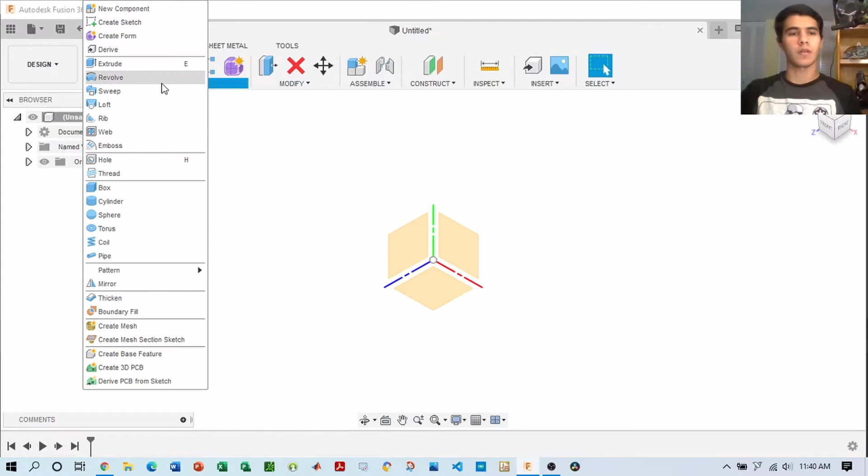So what we'll be doing today is I'll be guiding you through some steps you can incorporate in making these shapes or features. So what I did right now is create a sphere. Autodesk Fusion 360 already has a sphere feature incorporated, so you don't need to sketch a profile and then revolve it, although that could be another way. But like I said, you don't need to reinvent the sphere.

So there it is, it's a 70mm ball, and an overview of the different layouts. Over here on your left, you'll notice that once I created this body for the ball, it showed up here under Bodies. For Origin, there's a tab as well. If I want to, let's say, hide it, I can hide the body and it's gone.

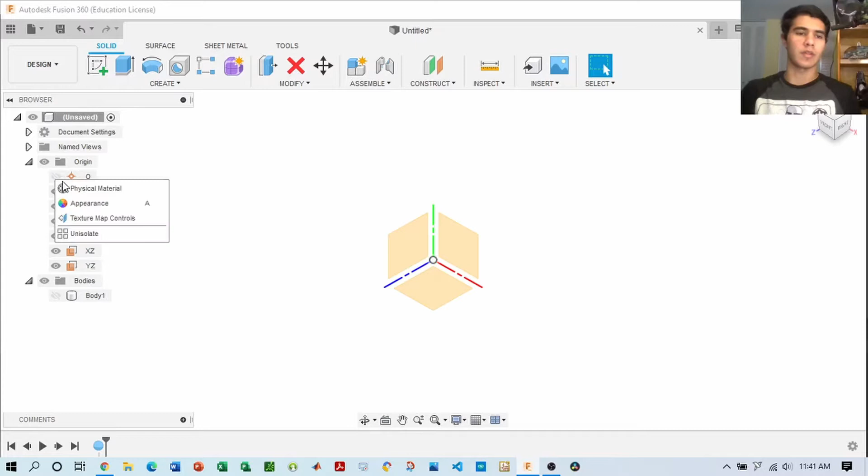If I want to hide any certain element within this plane, I can click on this eye looking icon and it's gone as well. Down here you'll notice every time you add a feature, it shows up on your timeline. So right now we just added a ball. If you want to delete it, you can drag this cursor down below and it disappears.

So we have our ball, and now we want to create the stars. In this case we'll be creating a 4-star Dragon Ball. Since you have the origin planes, but you don't have any other plane by which to draw it.

So what you could do, there's two different approaches to this. You can either draw in the middle, on the mid plane, or if you want to 3D print this, you might want to consider drawing outside, since you can't 3D print something inside, in the middle of a solid body.

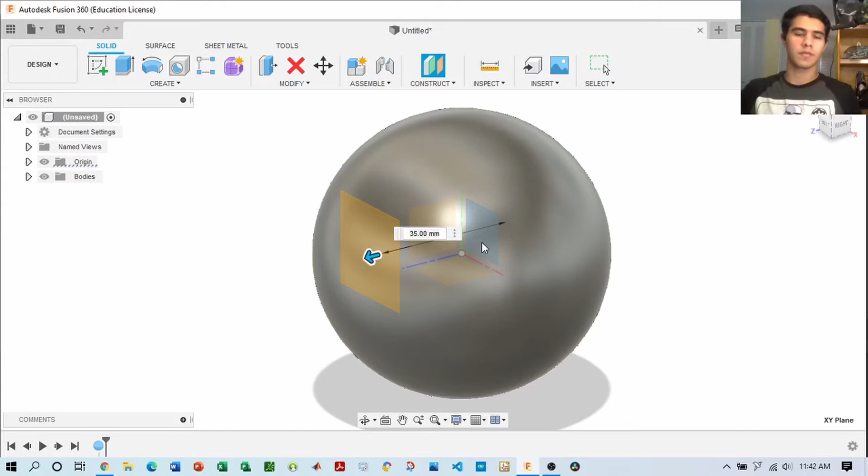So we'll be doing an offset plane. We'll be offsetting it, and you can see on the side our new plane created. And there it is, there's our new plane.

We'll be sketching on that plane now. So create sketch, it's going to ask you which plane you want to sketch it on. You can click on that plane and sketch it.

Now you can see to our left, we have a new tab called Construction. Construction is basically any planes, lines, points, or vertices that you make. Same deal, if you want to, you can go ahead and view it, or click it again to unview it. It sometimes helps to view it, but that's just your preference.

We'll click line. One feature about Fusion 360 is that it has a grid that it overlays over the object. This is helpful because you can have increments or incremental intervals by which you can snap your drawings to.

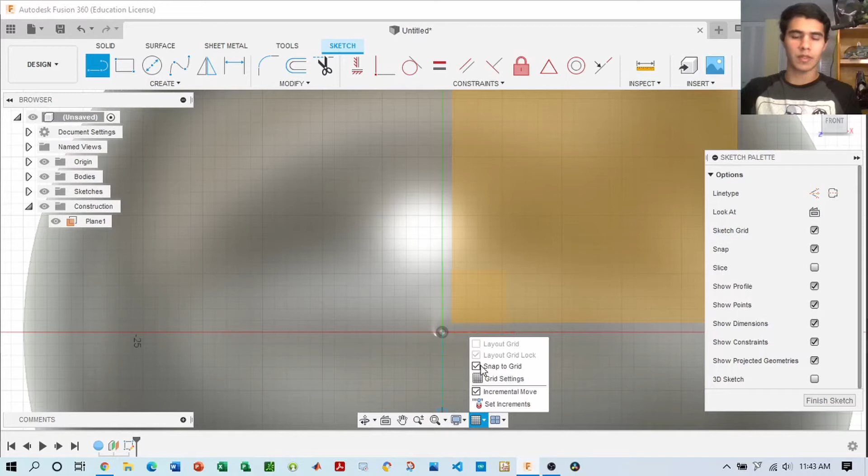The reason it snaps is because there's a feature down here called Snap to Grid. If you want to take that off, you can disable Snap to Grid, and then you can draw anything and it won't snap to the nearest block on this grid. For example, I'm just drawing something, it's not snapping to anything. Whereas if I enable Snap to Grid, every time you draw something it'll snap to the nearest object. See how it's snapping to the grid?

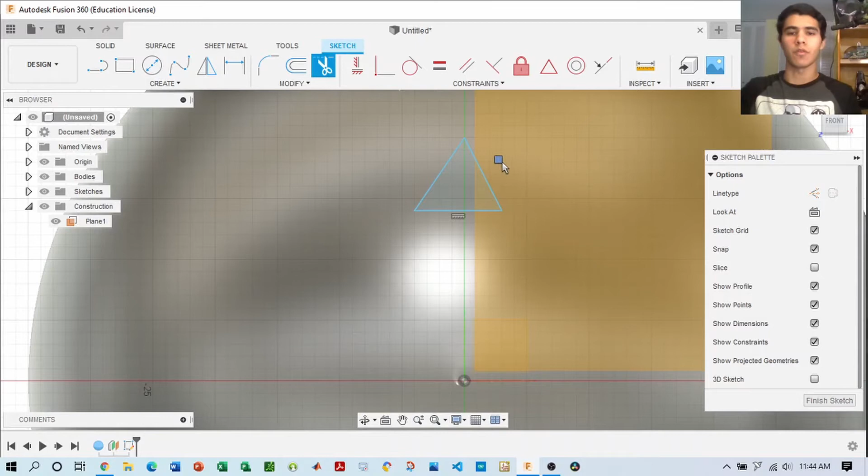So those are some useful features to incorporate when you're doing sketches. Since we're doing a 4-star ball, I'll be starting over here, and draw a triangle.

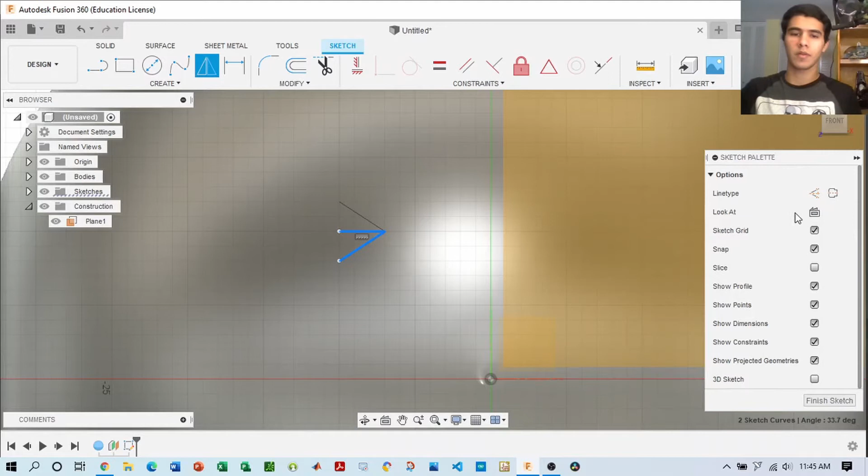You might be wondering, well, that's not a complete star. That's okay, let me show you some other features you can use to make this into a complete star. So right now I'm doing Mirror. I'm going to mirror one side of the triangle to the other side. It requires an object to mirror and the mirror line, and we have both. So we click OK, and now create a reflection of this object.

Next thing we want to do is a circular pattern of these two objects, along which center point? This center point. And it's going to create the star we wanted. In this case, it's a 5-point star. And that's it, easy as that.

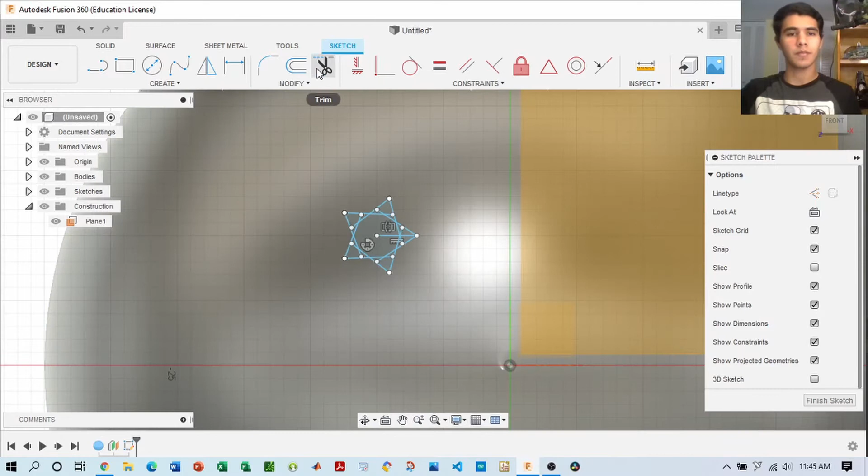We're done. All that's left to do now is edit these features. We can fillet it or trim it. Trimming is going to take away the lines and delete them, so it's a nice way to polish your sketches if you have excess parts. One more thing we'll be incorporating, a point here.

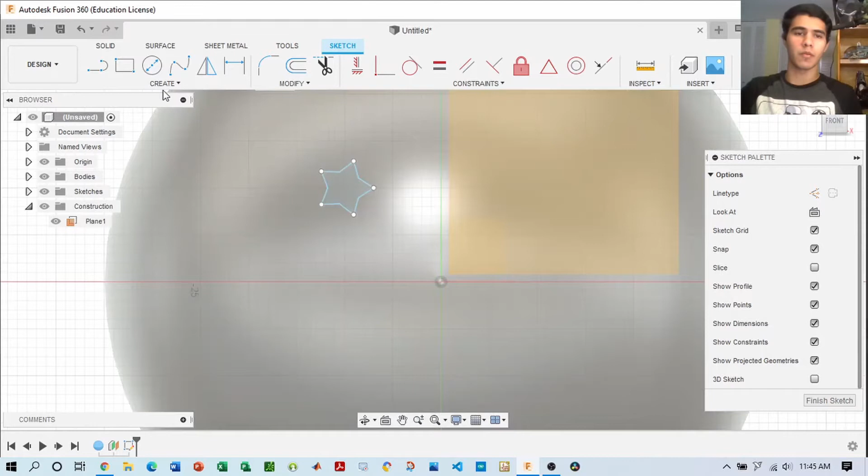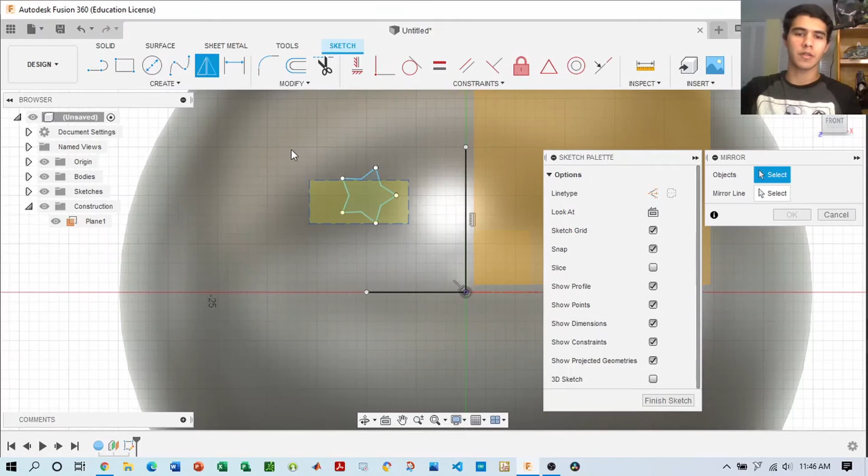Guess we can't, so we'll be incorporating 2 lines here. One line here, click escape, and another line here, click escape. It doesn't matter the size of these lines, since what we'll be doing is mirroring these objects over these lines. And then repeat the same mirror to the other side, and that will give us the 4-star ball we're looking for.

Looking pretty good, so now I finalize our sketch. And what is the tangible output is a sketch plane with 4 sketch profiles in the form of that lattice.

So we can extrude now. We click E on our keyboard for extrude, and we click our profile sketches. We want to extrude — in this case, we want to cut into the sphere. So we'll be dragging this cursor backwards into the ball, and it increments every 5 millimeters.

If you want to disable increment, you can go here to incremental move and disable that. All that does is basically, every time you click and drag something, it doesn't move by increments, it moves by however much you drag it, so it's not discretized. So we're going to go back and disable increments, and see now it's moving by every 1 millimeter versus the intervals you set it to.

It doesn't matter on which one you choose. Sometimes it comes down to preference, other times, depending on what you model, it makes sense to have by increments. For example, if you're doing prototyping, or if you have no idea how the concept is first made.

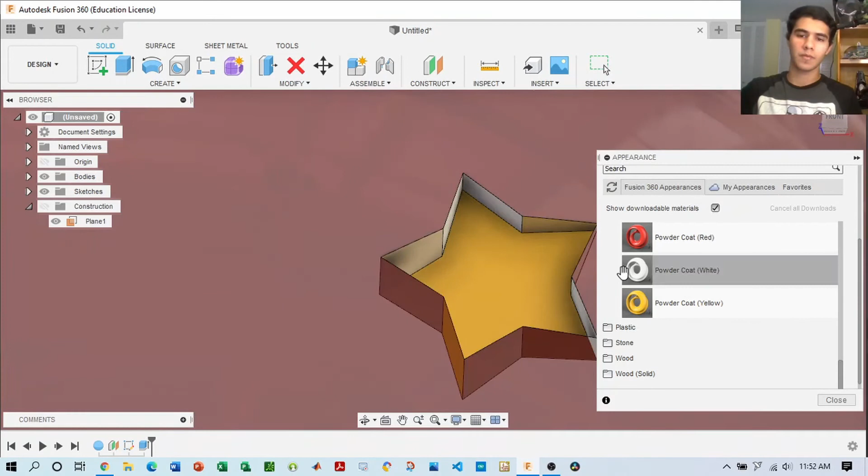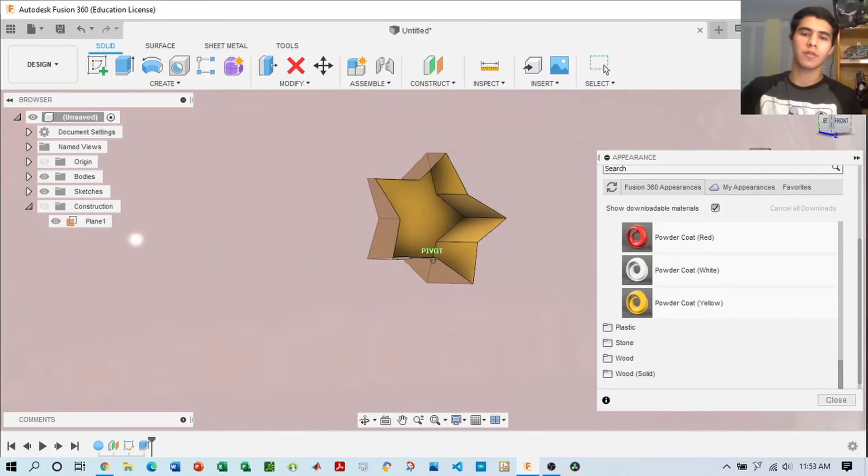If you're by any chance intimidated by Fusion 360, don't be. I think overall it's easier to manage than SolidWorks. The layout is much more presentable, easier to understand and navigate. The shortcuts are easy to learn, which I found personally appealing. Saves you so much time. But the good thing is to just get started today. Start modeling. Nothing beats practice on your own.

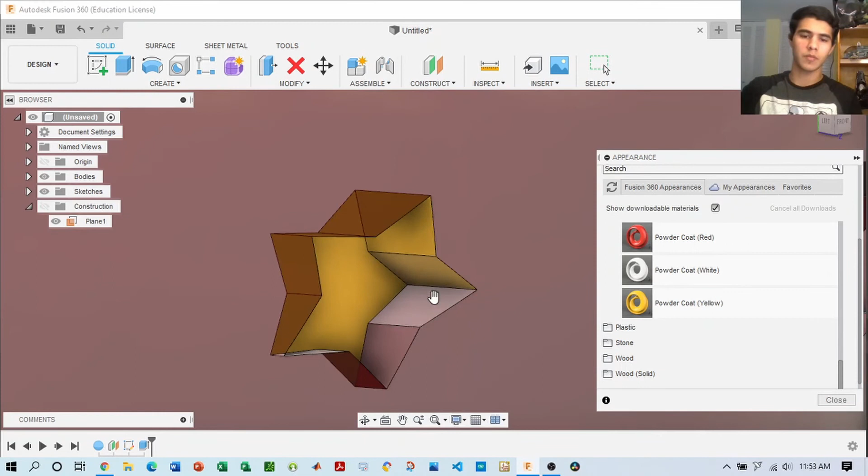How about that? So if you want to, you could leave it there. But let's say you want to change this color from glass to a different material. Let's go ahead and do that. And now let's make it more professional. Let's change the different colors we incorporated in this design so it can be as close as possible to the Dragonball.

How about that? So if you want to 3D print this, you can go ahead and just 3D print this. It will 3D print nicely. One other thing you could do to consider is when you inspect it, take a cross section of it.

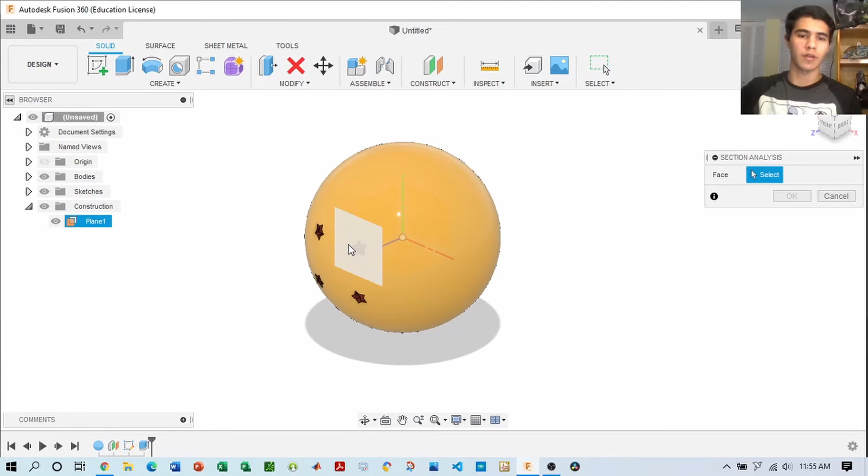So it asks you, okay, what face do you want to take a cross section of? And you can do a cross section of a plane. So you click and drag your cross section, and it will basically cut your shape in half. This will help you, for example, if you want to prevent extra supports from 3D printing. You just 3D print two halves together and put it into one. So that could help if you want to save up on supports.

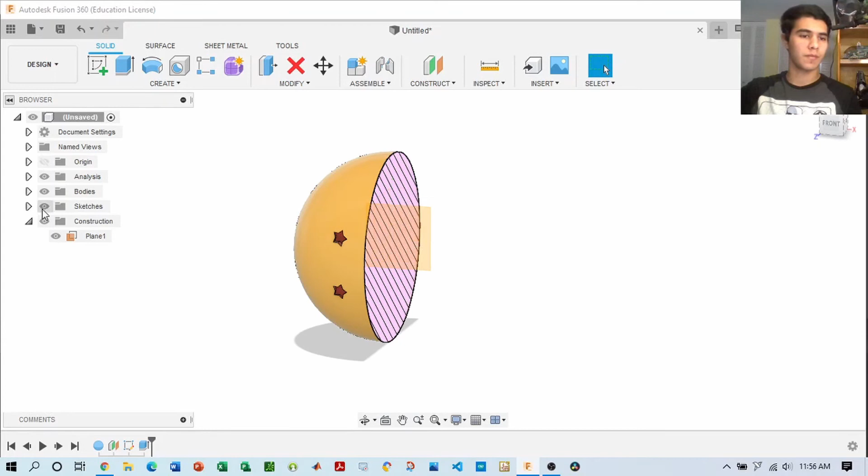If you want to, you'll notice here every time you construct a section analysis, you have this analysis tab now. So just like origins, you can click and hide it.

What's left? Well, now you know how to make one Dragonball. You can make the rest. But what I want to show you now is how to make this professionally presentable as a render.

So right now we have a render studio. And what that rendering studio basically allows us to do is make these objects more realistic. In a virtual studio, you can design to different settings, different exposure to light, etc.

So you just go to setup and you go to environment library. You can play with some features there as to how the lighting and the angle will reflect off the object. Usually I choose sharp highlights, but that depends on the object. This one looks good, and the different material properties you choose. Sometimes the light reflects better off metals, or depending on the object and material you select.

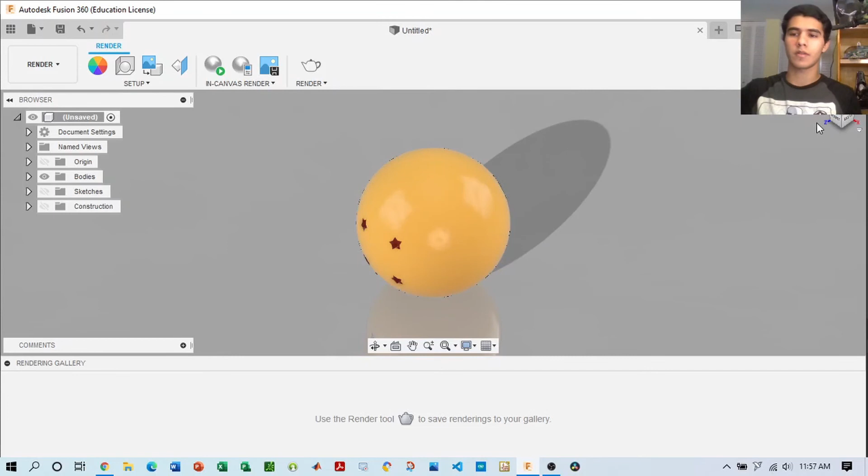So let's find an angle for this. That was like a nice angle. So once you're satisfied, you click render. So you need to save before you render. And you'll notice right now the title, it says untitled.

When you save it, it goes from untitled to the version you save it as. But in this case, every time you save it, there will be a prefix or a subscript that follows it. So right now it says public 4-star Dragonball version 0. That's because it's the first time you save it as this file. And the good thing about it is that it goes from version 0 to version 1. So after you save it for the first time, it becomes a new version.

And if you want to go back to an old version, you can do so down here. You go to your different designs and you see the different updates for your version if it's more than one. And you can see that design history, which is great to have.

So now you save it, you can render it. Let's render that. And the difference between final and standard is up to you. I don't think it's too much of a difference. That's why we're sticking with the 0 credits. But if you want to make it really presentable, then go ahead and just click the finalize render.

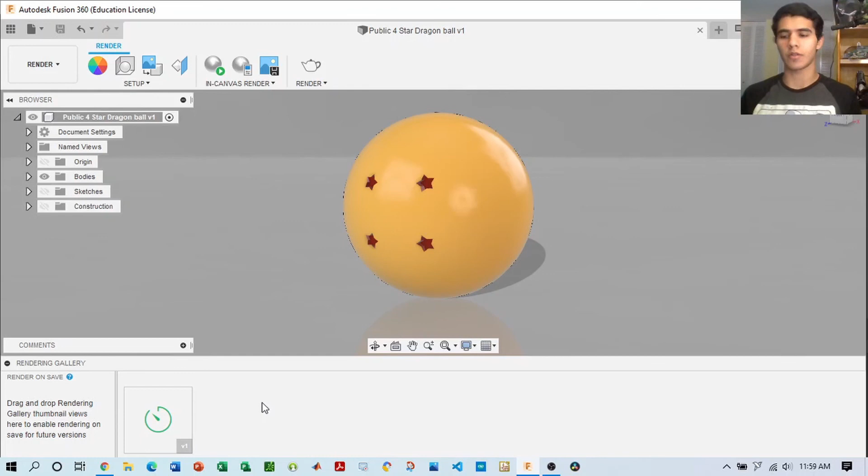And what that would do is basically create a queue. So right now, Fusion 360 is taking these different inputs in terms of lighting, reflectance, absorbance for the material you chose and the property you chose. And it's making within the studio a virtual interpretation of how the image will look if you put it that way, from that different angle, different lighting.

What you could do in the meantime, if you want to, you could capture this image. And this image would basically capture the workspace. Save it, and you could save this image as a memento or as a reference for future objects.

So yeah, with those knowledge tips in mind, you can apply these different concepts to whatever model you're building. So if it includes a sphere, you know how to do it, as well as circular patterns and sketching and mirroring. So I hope you enjoyed this video, and I'll see you guys on the next one. Stay safe, guys.